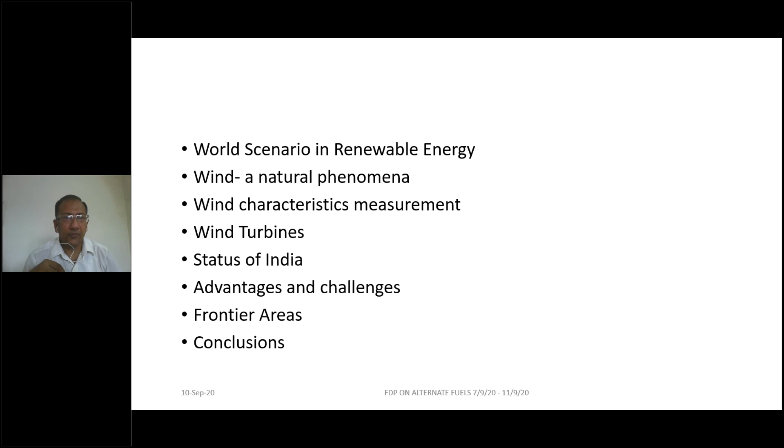The presentation is organized into these main topics: world scenario in the renewable energy sector, wind as a natural phenomena, characterization of wind, various types of wind turbines, status of India, where India stands, advantages and challenges, then the frontier areas, and finally the conclusions of the talk.

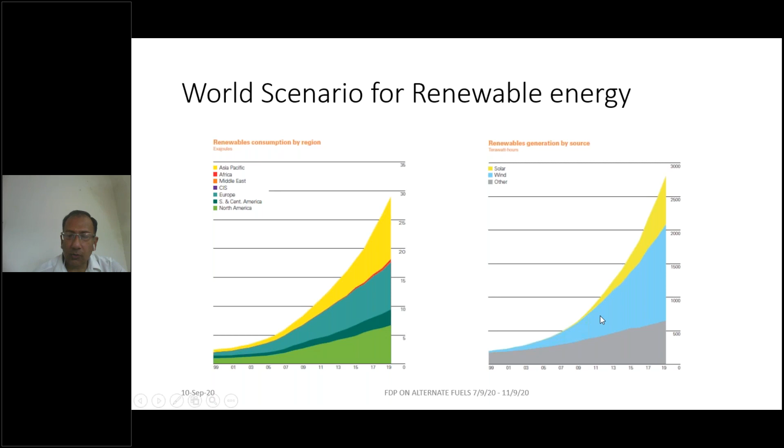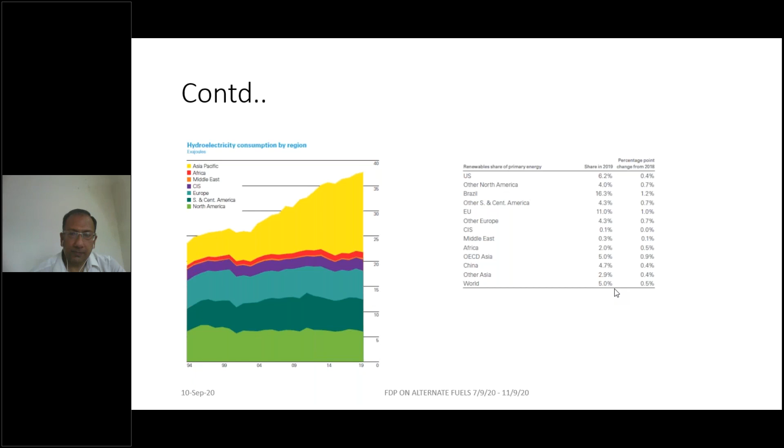On the world scale, we have an international agency called the International Energy Agency, IEA. This is a nodal agency which helps all countries shape a sustainable energy future. It is an agency that helps countries if they approach IEA for any advice, technical support, or other support to shape sustainable energy in the future.

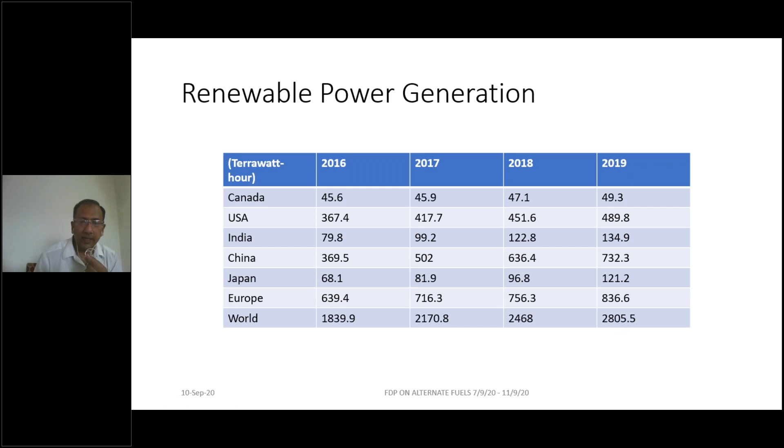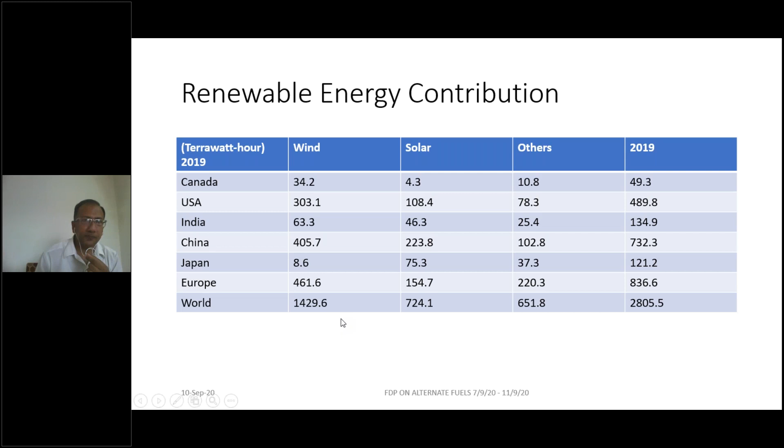Now let's see what wind is. Wind is a natural phenomenon caused by the presence of the sun and solar energy, so it can easily be said that wind is a form of solar energy. The reason for this phenomenon is the uneven heating of Earth, which causes the flow of air called wind. Earth receives around 1.8 into 10 to the power 11 megawatts of solar energy, and out of this, 2% is converted to the movement of air.

That comes to around 3.6 into 10 to the power 9 megawatts. Further, out of this 3.6 into 10 to the power 9 megawatts, 35% of wind energy is available within 1 kilometer of Earth's surface. So you can easily see that if we look up from Earth, we have energy available in the free air itself.

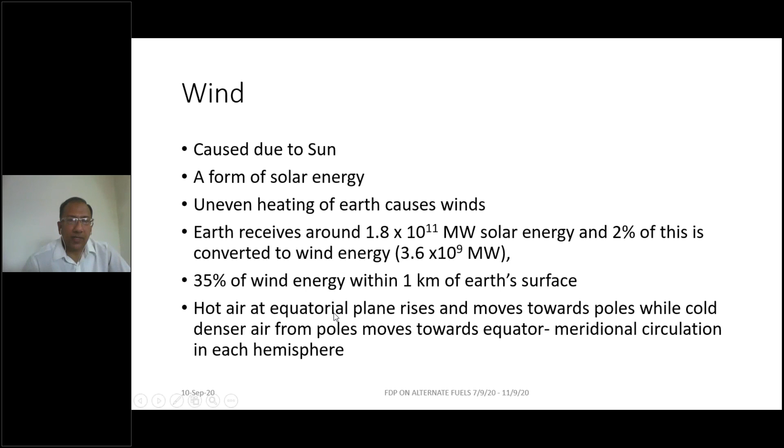The hot air at the equatorial plane rises because the equatorial plane is the hottest region on Earth, and moves towards the poles, while cold, denser air from the poles tries to replace this hot air and moves towards the equator. So ideally, there should be a meridional circulation in each hemisphere, with a flow of air from the equatorial plane towards the poles and vice versa, because the hot air becomes less dense and rises, moving towards the poles, while the cold, denser air from the poles replaces it.

But there are certain other phenomena which make this ideal situation non-ideal. First is the tilt in Earth's rotational axis, which we have studied in lower classes, resulting in seasonal variations. This tilt of 23.5 degrees also influences the meridional circulation. Second is topography: Earth's topography is not the same everywhere. At certain places we have mountains, valleys, hills, plains, or other features, and these features obviously interfere with the movement of air.

Thirdly, the covering on the Earth's crust. The Earth's crust is not uniform everywhere. At certain places we have vegetation, at certain places water bodies, ice, land, deserts, etc. So all these coverings will again influence the behavior or movement of air.

Now the major effect of tilt is the Coriolis effect. The tilt in the rotational axis of Earth results in the Coriolis effect. So the rotation of Earth deflects atmospheric movements—towards the right in the northern hemisphere and towards the left in the southern hemisphere. So the air in the northern hemisphere is shifted towards the right because of the rotation of Earth, and it is shifted towards the left in the southern hemisphere.

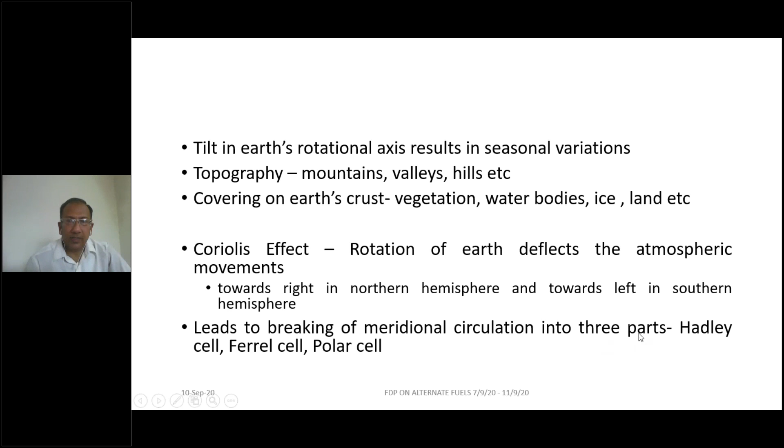This leads to the ideal meridional circulation being split into three parts. We have three types of cells identified: Hadley cell, Ferrel cell, and Polar cell. So this is a diagram—say this is Earth, with North Pole, South Pole, and equator. Had it been an ideal situation, the hot air from the equator should move towards the poles and come back, and the dense air from the poles should come to the equator, giving us a hemispherical meridional circulation.

But because of the Coriolis effect, because of the rotation of Earth itself, the wind is thrown towards the right in the northern hemisphere and towards the left in the southern hemisphere. So the Coriolis effect counterbalances the pressure difference available at the tropics. So the hot air which was available at the top of the atmosphere in the tropics is pushed back towards Earth, and it breaks up into cells—giving us the Hadley cell and Ferrel cell.

Similarly, at 60 degrees we again have a change in the pattern of movement of air. So practically speaking, we have three cells identified: the Hadley cell between the equator and the tropic, the Ferrel cell between 30 degree and 60 degree latitude, and the polar cell between 60 degree and the poles. This type of wind behavior has already been characterized and studied.

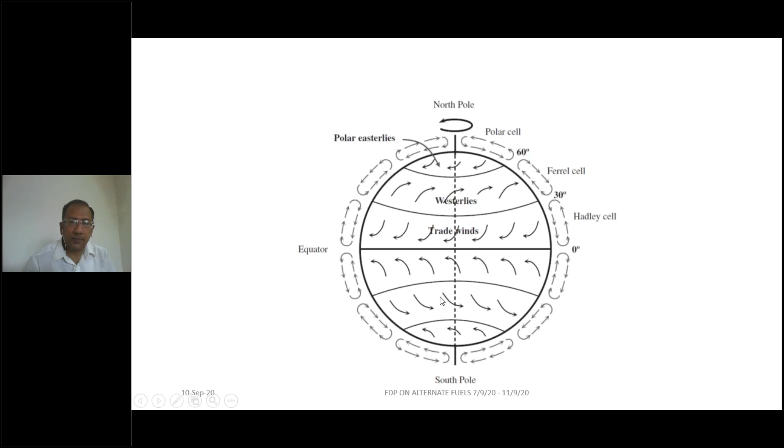Now wind types have been classified into planetary winds, synoptic winds, mesoscale winds, and microscale winds, depending upon the spatial scale of the wind. What we talked about earlier was planetary wind—these are planetary circulation modes, a global circulation where the length of operation is on the order of tens of thousands of kilometers.

Synoptic winds are due to the weather system in a given region, with an effect of about 1,000 kilometers. Mesoscale winds involve regional orographic or thermally induced behavior, at a scale of 10 to 100 kilometers—a very local scale. Microscale wind patterns are totally local, due to boundary layer effects, such as differences between urban and rural areas, with a length of influence of 100 to 1,000 meters.

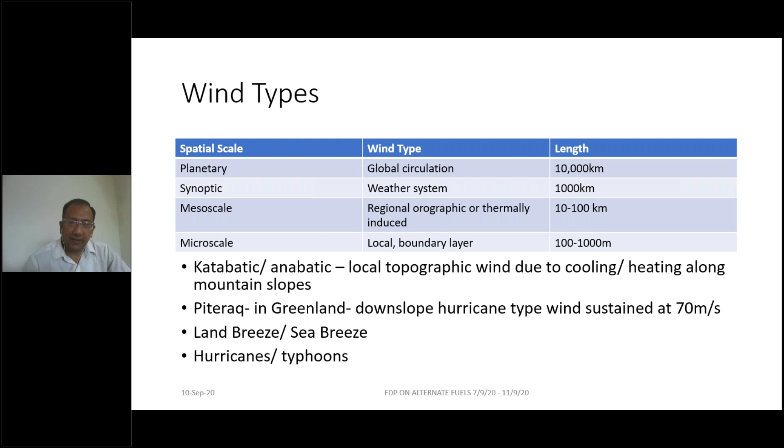On top of all these types of winds, we have certain specialized situations. One is katabatic and anabatic winds—local topographic winds due to cooling or heating respectively along mountain slopes. Piteraq is another type, a hurricane-like wind found in Greenland, where the wind is sustained at 70 meters per second downslope. Then we have land breeze and sea breeze, a topic we studied earlier, as well as hurricanes and typhoons. So wind is definitely a wonderful thing, but it takes many forms.

This diagram shows sea breeze and land breeze on the left hand side. During the day, the land area becomes hotter compared to water bodies, so the less dense air rises, and air from the water bodies replaces the air which has risen up. This becomes the sea breeze—a breeze from sea towards land during the daytime.

At night time, the land is colder than the water bodies. So now the air in contact with the water bodies rises, becoming less dense, and it is replaced by wind or air from the land. That is called land breeze.

Katabatic winds: suppose we have a mountain or hill slope totally covered with ice, or some sort of glacier. The air which contacts this cold surface increases in density and starts falling down, so we find the wind constantly moving along the slope—this is called katabatic wind.

The reverse is anabatic wind. Suppose there's a slope structure, a mountain or something, which is warmer than the surroundings. The air in contact with this warmer surface takes up heat and becomes less dense, so it starts rising. Now we have a rising wind moving from the bottom towards the top of the slope—this is called anabatic wind.

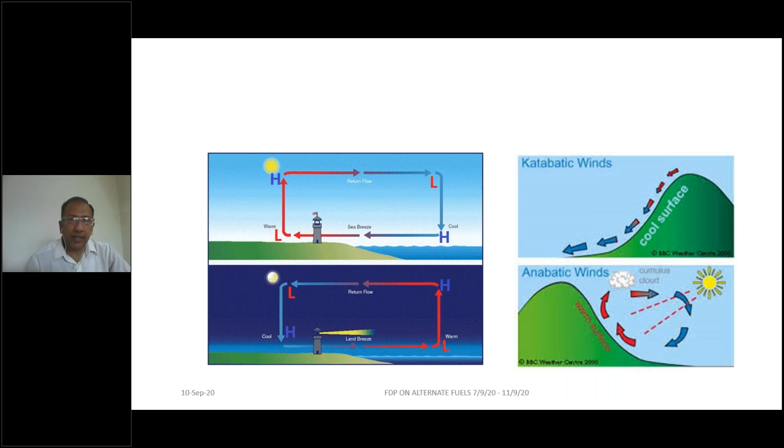With this information, we can easily see that wind takes up many forms, and there has to be certain means to characterize the wind information. So next is measurement of wind characteristics.

This measurement is a very tricky situation. The conventional method was usage of a measurement mast, and it still is. It hasn't stopped. The conventional method is still being used, and it has to be used till newer methods evolve. Generally speaking, 10 meters above ground level we have a pole called the measurement mast. The height is generally 10 meters because that was the standard when we started harnessing wind energy.

So we provide a wind vane system, which gives direction information, and an anemometer. An anemometer is a device used to measure the velocity of wind. We organize a set of anemometers and wind vanes on the mast, take the data, and try to correlate it. This way we are able to measure the characteristics of wind in a given region.

Now the hub heights have increased. Suppose this is a turbine - the moving part is called the hub. The height of this hub has increased, so we have to measure at higher and higher distances. The mast assembly has to be taller and taller, and because of the taller mast, the cost has increased prohibitively. But still, we have to go in for measurement. There's no other way out.

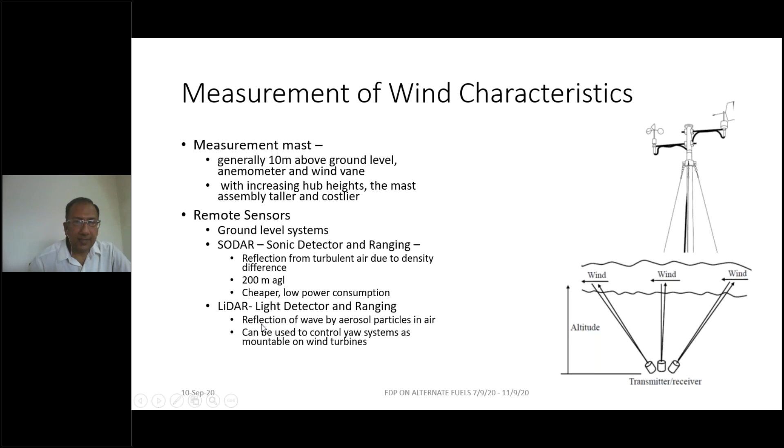This table shows you the recommended tower height, recommended anemometer height, and recommended vane heights. If hub height is 30 meters, 37 meters, 55 meters, 60 meters, 80 meters, the tower height recommended is 30, 34, and so on.

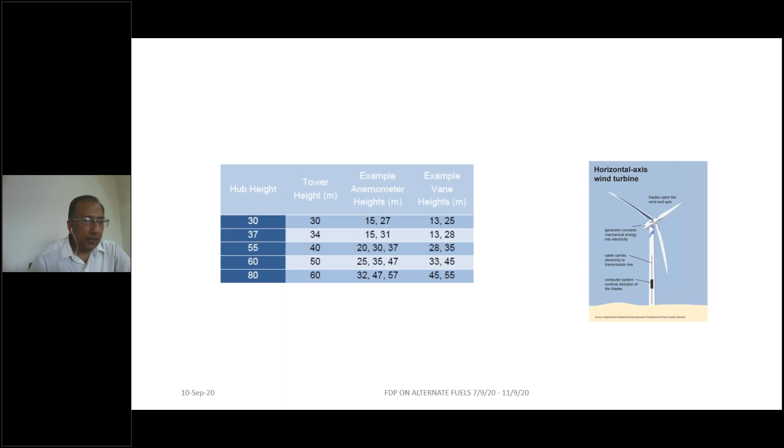We have standardized information on where we should place the anemometers to measure the speed, and where we should place the vanes to measure the direction. This way we can measure the direction and speed of wind, and once this information is ready, only then can we go in for any analysis or project on wind energy harnessing.

This picture shows you a measurement mast. You can see that we have a set of anemometers here, a set of wind vanes here. This is a picture of a SODAR, and this is a picture of a LiDAR.

This information can be further enhanced by usage of wind speed. In consonance with the earlier basic wind rose diagram, even wind speed is plotted on the same diagram. Again we have 0%, 4%, 8%, 12%, 16%, 20% information, representing the frequency of occurrence of wind, but the areas have been colored based upon the wind velocity.

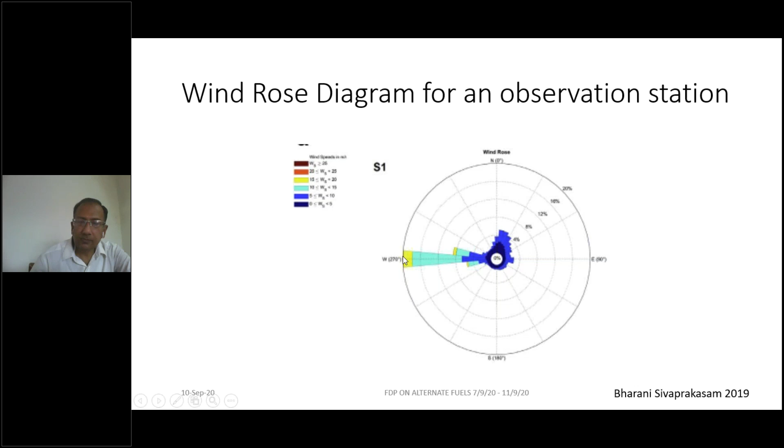This is the annual wind direction and speed for a set of 4 stations placed at a given observatory. We can see that the 4 stations do not give you the same information because wind patterns vary from location to location. This is annualized information compiled by authors Bharani Sivaprakasam in the year 2019.

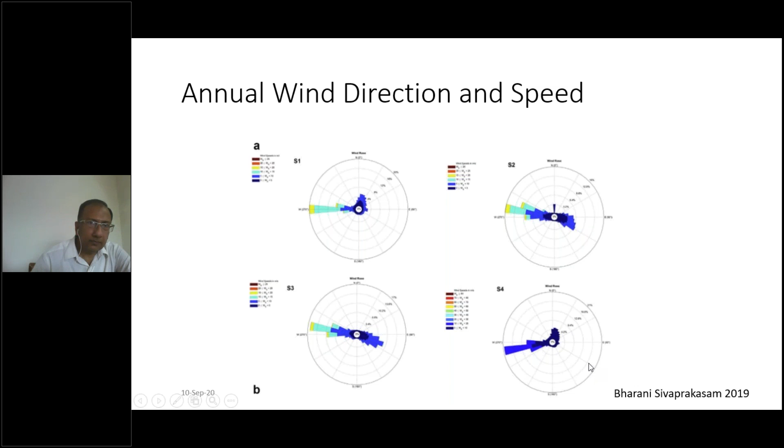Now coming to the equipment for usage of wind energy or harnessing of wind energy. The earlier equipments were called windmills, and the modern ones are called wind turbines. Although common people do not have much distinction between the two words, what is a windmill, what is a wind turbine, technically speaking, by the terminology of wind energy systems, windmills are different from wind turbines.

Windmills were the ancient or older structures which were built to create mechanical work, and mechanical work could be in the form of grain grinding or pumping of water, irrigation, and so on. So they were used in older times. These are 2 pictures: this is the famous Dutch mill, and this is the famous American mill. These are windmills which are only to create mechanical energy, and we are using mechanical energy as such.

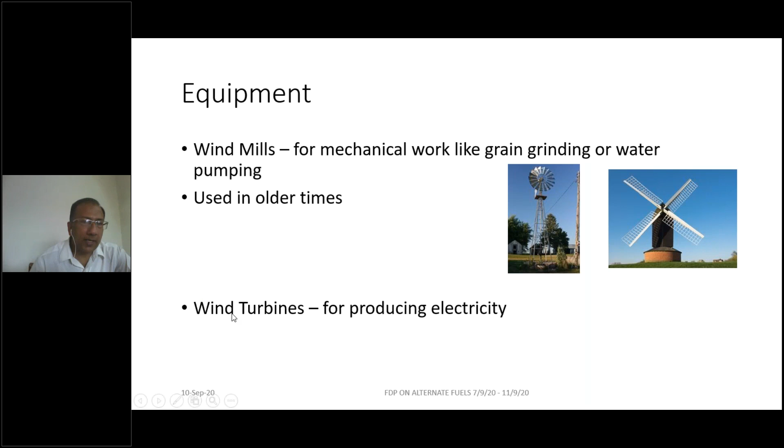But the modern systems, modern wind energy systems, are called wind turbines. Turbine is a universal term used to denote equipment used to generate electricity. The modern systems are being put up only and only for production of electricity, which is why the modern systems are called wind turbines.

Now some basics. The power of wind, which can be harnessed, depends upon the volume of air trapped by the system, the velocity of air, and the mass flow rate. The mass flow rate dm/dt is given by density rho, area of the mill A, and u, the velocity of the wind.

So the kinetic energy is half mu square. Power is energy per unit time, so if I differentiate this with respect to time, I get half dm/dt into u square. Replacing dm/dt, P becomes half rho A u cube, where rho is the density of air, A is the area of the windmill, and u is the velocity of air.

So we can see that power is proportional to the cube of velocity of air. If velocity increases by a factor of 2, the power must increase by a factor of 8. That is an idealized situation.

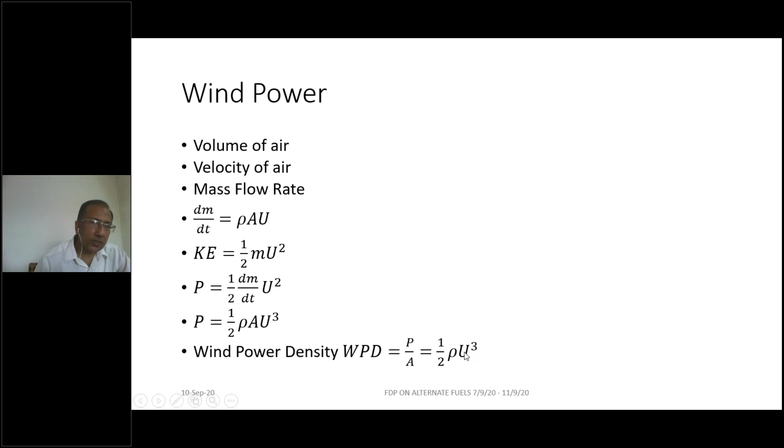Wind power density - this is power as such, in watts. But all the literature talks of wind power density, which is power per unit area. That becomes half rho u cube. So wind power density is directly proportional to the density of air, and proportional to the cube of velocity. This is the idealized situation.

But we have a limit known as the Lanchester-Betz limit. The rotor collects wind energy by slowing down the wind. So windmills operate in the sense that wind energy drives the rotor, energy is supplied from wind to rotor, so the wind gets slowed down. Now it cannot happen that all the energy of the wind is taken up by the rotor, that the wind is brought to a standstill - this is not possible. So the maximum amount of wind energy collected by the rotor can be 16 by 27, or around 59%, and practically this limit is 35 to 45%.

If I take all the irreversibilities in the mechanical system and all other system friction into account, the complete system efficiency drops down to 10 to 30% of the total energy available in wind.

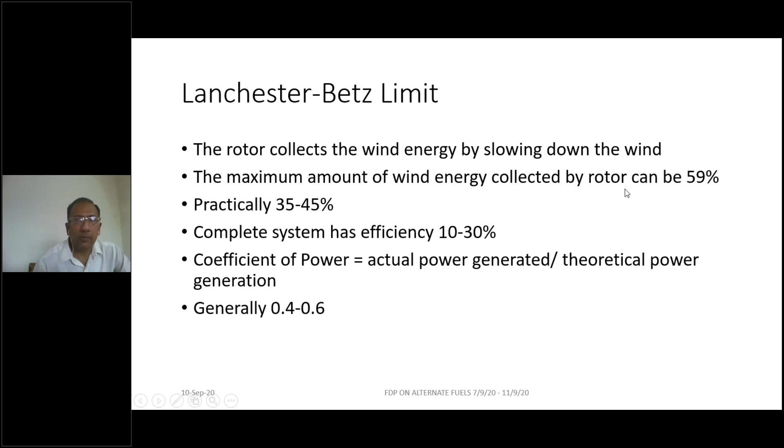Then we define another term called coefficient of power - the ratio of actual power generated to the theoretical power generation possible. Generally the coefficient of power for wind turbines lies between 0.4 to 0.6, so 40% to 60% of the theoretical power is generated by any given wind turbine. 59% is the Lanchester-Betz limit, the limit of energy generation from any given wind source.

One is called cut-in speed, then we have cut-out speed and rated speed. Cut-in speed is the minimum speed at which the turbine blades start rotating and some power starts generating - that is called cut-in speed.

Cut-out speed is the highest speed at which the turbine can work, and if velocity goes beyond this cut-out speed, the rotor should be brought to rest, because otherwise structural damage to the turbine may occur. So there is a limit - the turbine operates between cut-in speed and cut-out speed. I cannot operate a turbine beyond cut-out speed, and I cannot operate it below cut-in speed.

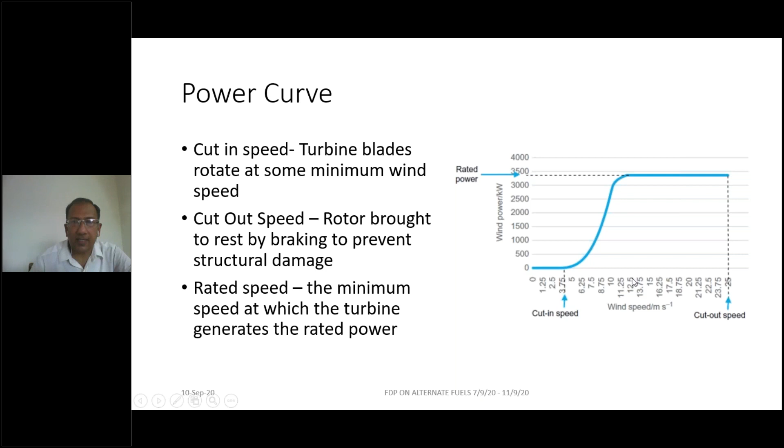The wind power is classified into 7 categories, category 1 to category 7. So 1 is poor, 2 is marginal, 3 is fair, 4 is good, 5 is excellent, 6 is outstanding, and 7 is superb.

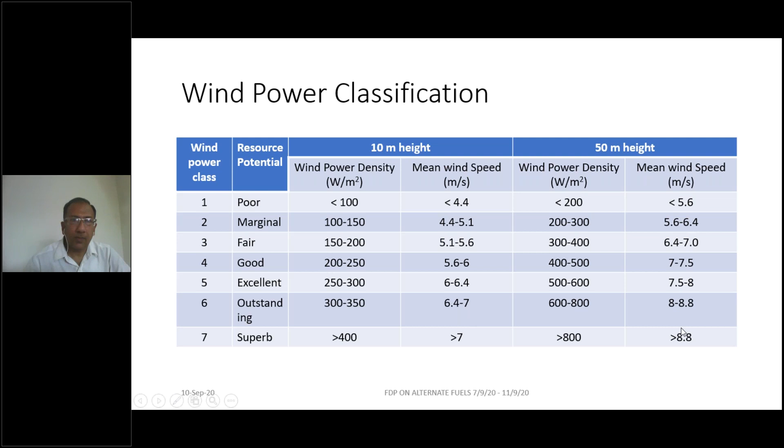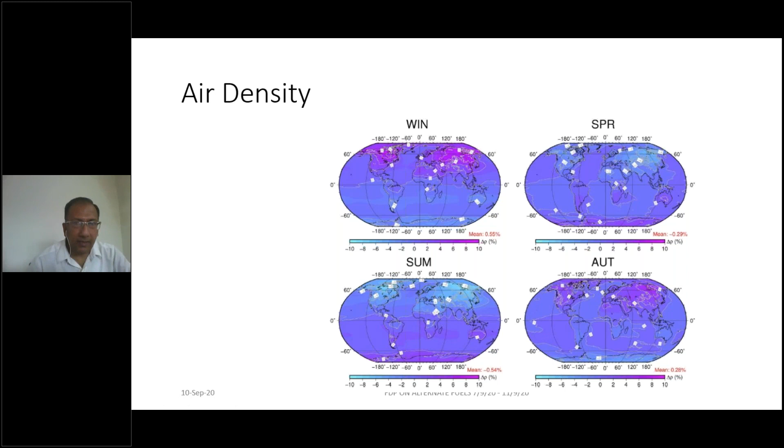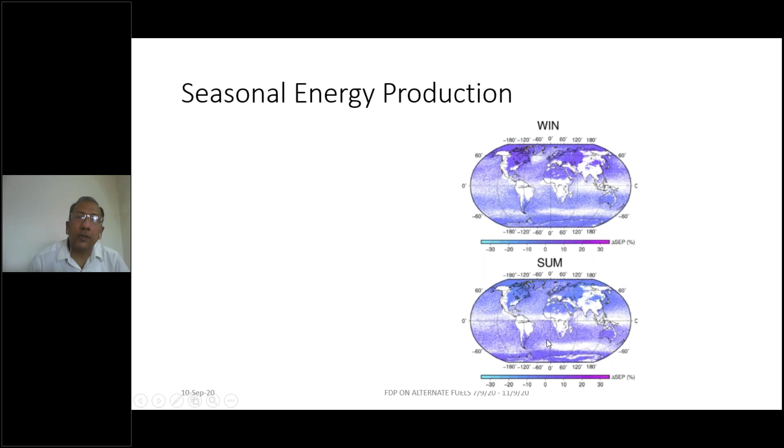Seasonal energy production, winter compared to summer. We can see this comparison in these two figures. In winters, the seasonal energy production shows around 10% change in the northern areas, and it is around minus 5% change in the northern areas during summers.

Coming to equipment, wind turbines are classified based upon various criteria: rotor axis, number of blades, rotor speed, direction, and power control. For rotor axis, we have horizontal and vertical wind turbines. Number of blades can be 1, 2, 3 or more. Rotor speed could be fixed speed or variable speed. Direction could be upwind or downwind. Downwind is not generally preferred because of boundary layer requirements, and downwind blades are not very good in operation. Power control could be stall, pitch, or yaw.

Components of a horizontal axis wind turbine: we have the rotor, which consists of blades and hub; the nacelle, which houses the gearbox, the generator, and the brake assembly; the tower for hoisting the wind turbine; and the anemometer and wind vane.

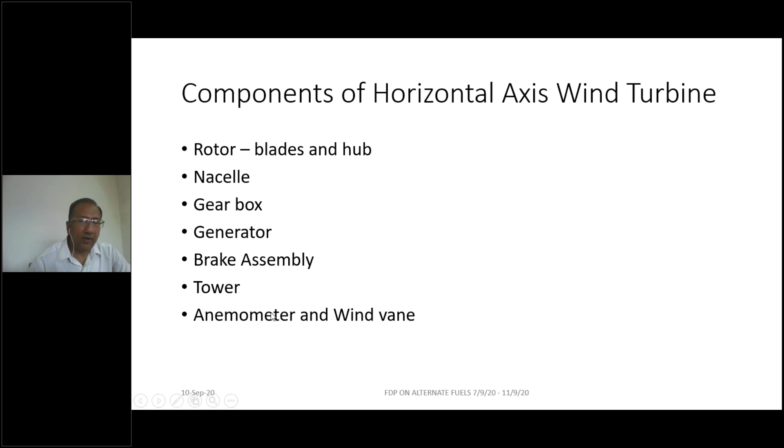We provide an anemometer and wind vane on the nacelle to get information about wind direction and wind speed. According to this information, a controller controls the behavior of the wind vane through yaw control. Suppose the wind direction shifts from left to right, or right to left, then the windmill should rotate, and the yaw mechanism will rotate the mill accordingly.

Lidars can be mounted on the nacelle. So instead of the anemometer and wind vane, a lidar can be mounted here, and the lidar can drive the controller in that sense.

The rotor collects wind energy using the blades, which are attached to the hub, which is connected to the shaft. Blades can be made of wood, fiberglass, metal, alloys, or carbon fibers. The number of blades is generally up to 3, so that interference of wind speed patterns from other blades is not observed.

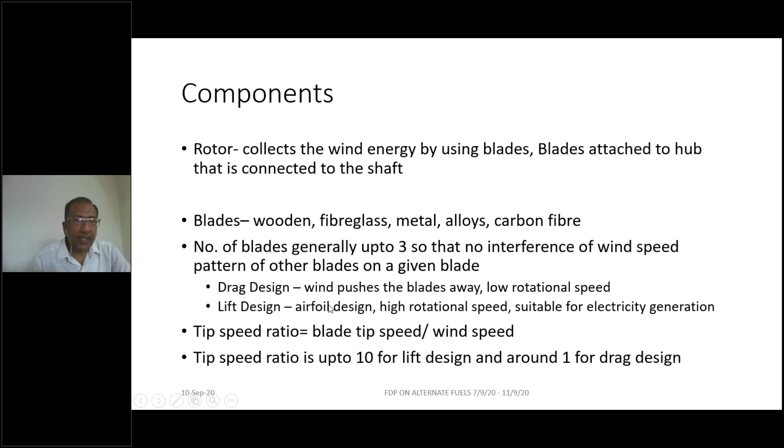We have single blade turbines, two blade turbines, and three blade turbines. In single blade designs, we have a blade and a counterweight. This is the least costly option, but stability is a big issue, so it's generally not preferred.

For two blades, compared to three blades, the two blade design is lower cost. But to prevent wind shocks, complex designing is required. So most turbines are not two blade turbines.

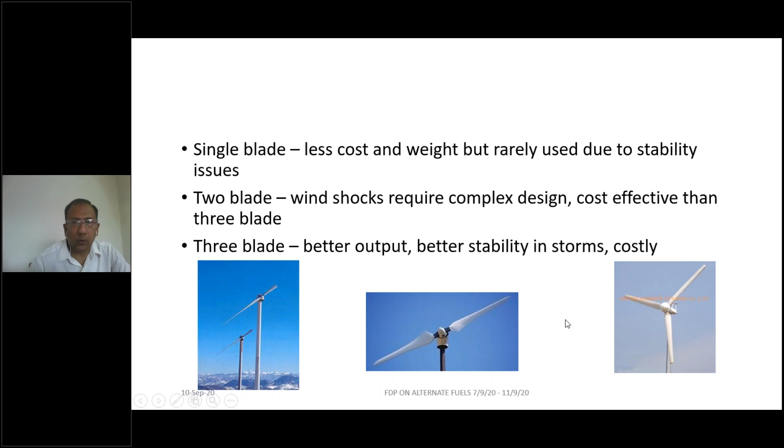Three blade systems give very good output and better stability in storms. They are definitely the costliest of the three options, but still most turbines have three blade systems.

Now the gearbox: we already said that the speed of the turbine is generally 40 to 400 rpm, while the generator operates at 1200 to 1800 rpm, so we require a gearbox.

Electricity generators can be of three types: DC generator, AC synchronous, or AC asynchronous motors. In DC generators, the magnetic field is on the stator and the armature is on the rotor, so it is for local consumption only. When we want to generate electricity and use it locally, we use a DC generator.

AC synchronous motors: synchronization of frequency with the grid is very delicate, which becomes a big disadvantage. The system is very rugged and simple, but constant frequency maintenance is a big headache, so it is costly and prone to damage.

AC asynchronous motors use induction machines. Here we have two options: fixed speed machines or doubly fed induction generators. In fixed speed machines, most machines made in the 1980s to 1990s were of this type. Maximum turbines are of this type, but they are very prone to damage.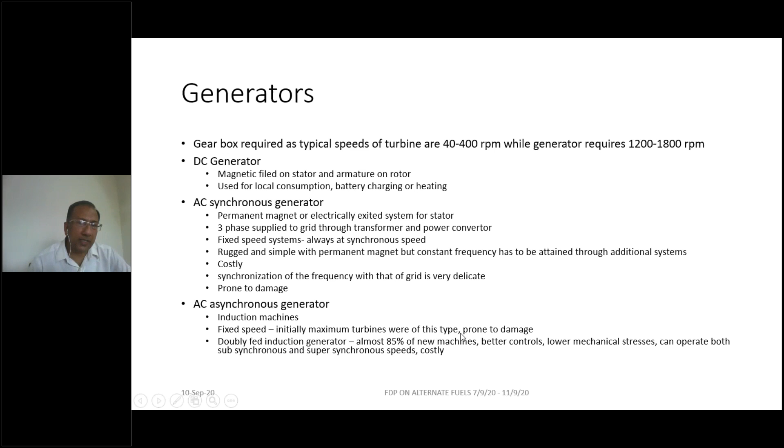Then doubly fed induction generators were investigated, and now the new machines are almost 85% of this type of generator.

Then braking: we have to put brakes on the wind turbine because if the wind speed suddenly increases due to a storm or something, the turbine may be damaged by the high wind speed. So we must brake. There can be a mechanical brake available, or we can have pitching of blades so the wind spills over, or we can use spoilers.

Drag spoiler flaps are provided on the blade or hub, which activate a spring-loaded mechanism to rotate the machine sideways.

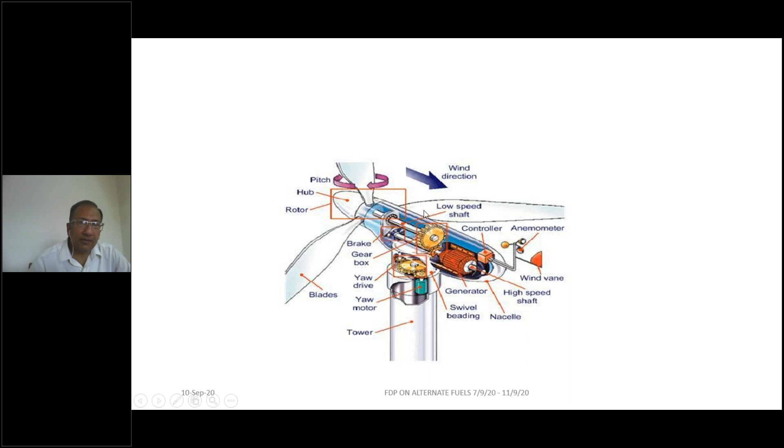We can change the pitch of the blades so the wind is not able to affect them—this is pitching control. Or we can simply have spoilers, which change the direction of the windmill itself. Instead of facing the wind, we make it face 90 degrees, so the wind won't affect the mill. That is the use of spoilers.

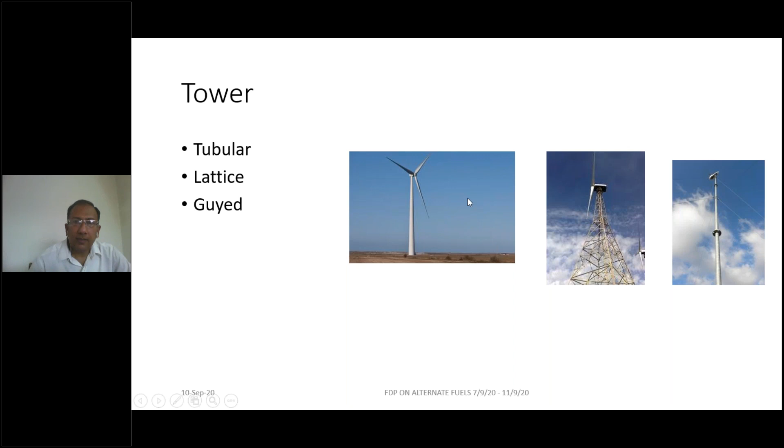The tower for hoisting the windmill can be tubular, lattice, or guyed. Tubular is a simple tubular steel structure. Lattice has a particular type of geometry, and guyed towers use guy ropes to keep the tower in place. The amount of area required for a guyed system is higher than that required for tubular or lattice structures.

Fixed speed systems were in force till the 1990s, which was the Danish concept—these are called type 1 systems. The generator is directly connected to the grid through a transformer. The price is very low, and it is simple and robust, but the stresses are very high and fatigue is very high.

And the power output cannot be optimized. So that is the major disadvantage.

So then we switch over to variable speed. Variable speed systems were used, where the speed was varied using controllers. When controllers come into play, the things become costlier. So we have limited variable speed, and variable speed with power conversion, type 2 and type 3 machines.

Limited variable speed types are OptiSlip and FlexiSlip. Here the resistance of the rotor is changed by the controller mechanism so that the speed gets changed in response to changes in wind speed. So the circuitry is simple, stresses are reduced, we achieve certain partial control, but at a cost.

Variable speed with power conversion has more controllers, so up to 30% variation can be done, compared to only 10% in limited variation. Losses are still lower, but it is a very complex and expensive system.

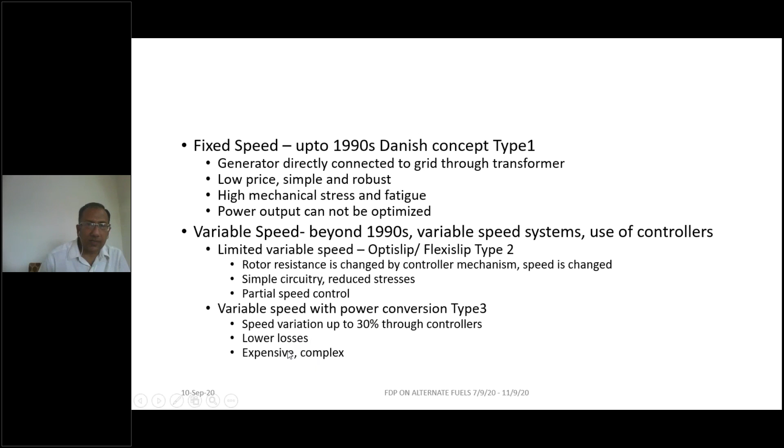So when we have a variable speed system, we measure the RPM of the wind turbine, the nominal RPM, and control the pitch and further information. So we have lots of controllers involved.

We've said that the power curve should be rising and then leveling off for a fixed speed system. If it is a variable speed system, it goes up as shown by the dotted line and then comes down at high speeds. This is how the variable speed system power curve will look like.

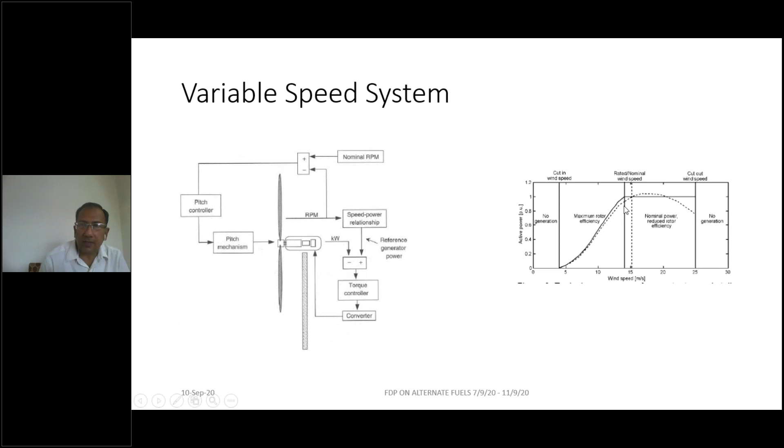Power control is required for reliable and safe operation and for optimizing the output. At higher wind speed, the power generated may exceed the rated values, so we have to avoid this and limit the power generation within some range.

One option is pitch control, changing the pitch of blades. This is a simple concept; the effect of wind speed on blades will be varied, and this way we can have a stable operation. So this acts as a security system for high speed winds.

Initially we had hydraulic actuators which changed the pitch of all the blades in the same manner when pitching control started. But now we have advanced controllers and actuators for each and every blade, because wind turbines have become very large in size, so the top blade and the bottom blade do not have the same load.

We find that the loading of the blades is not the same, so definitely the pitching should not be the same. That's why you have an individual actuator for each blade in the pitching control.

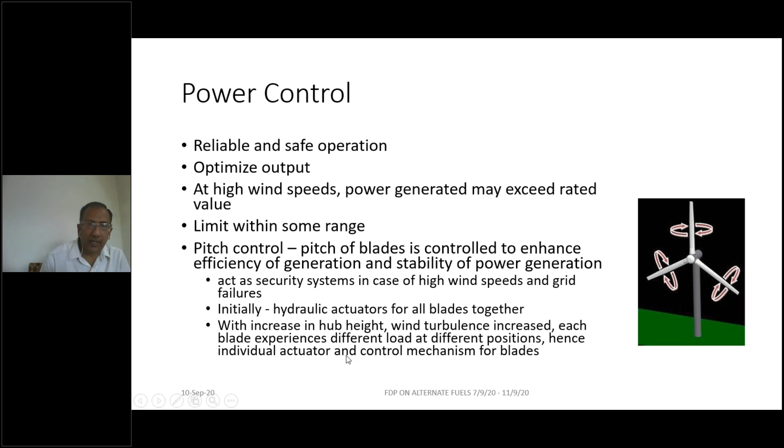Second is stall control, where we stall the blades and make them come to rest. In passive stall control, the blades are bolted to hubs and twisted aerodynamically, so the blade design is such that turbulence generated on the downwind side of the blade leads to no lift at higher speed. When speed is very high, because of the turbulence behind the blade, lifting is avoided. So the system stalls, the pitch changes and the machine stops. It is simple with lower efficiency, but it is very complex to build, so it is limited to small or medium scale systems.

Active stall systems are similar to pitch blade systems, where blades are pitched to waste the energy. These are used for large wind turbines.

Now coming to yaw control, as we said we will talk about later. In yaw control, we try to maximize the power output and minimize the asymmetric loading by usage of a motor. This is a slow action system where we shift the orientation of the turbine itself depending upon the wind speed and direction.

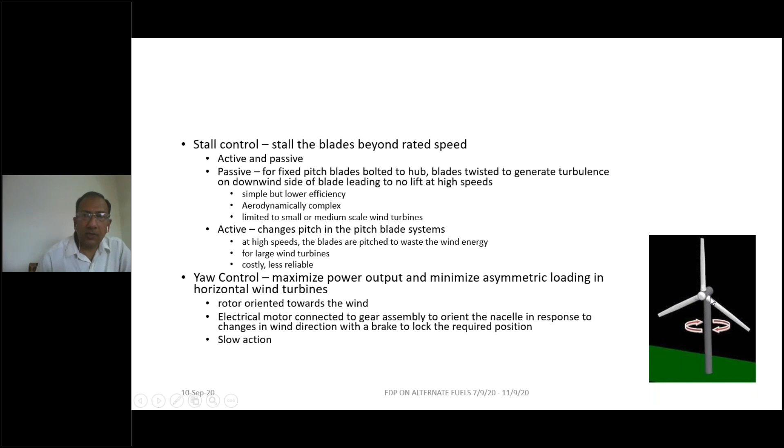Now coming to vertical wind turbines, the second type of turbine. The advantage is the direction of the wind does not affect the operation; wind may flow from any direction and it will still operate. The generator and transmission are at ground level, so weights are lower and costing is lower. But the major disadvantage is they cannot exploit higher wind velocities at higher elevation.

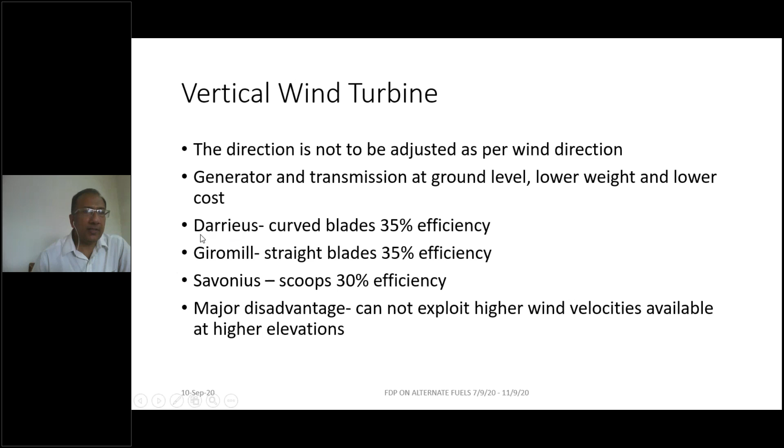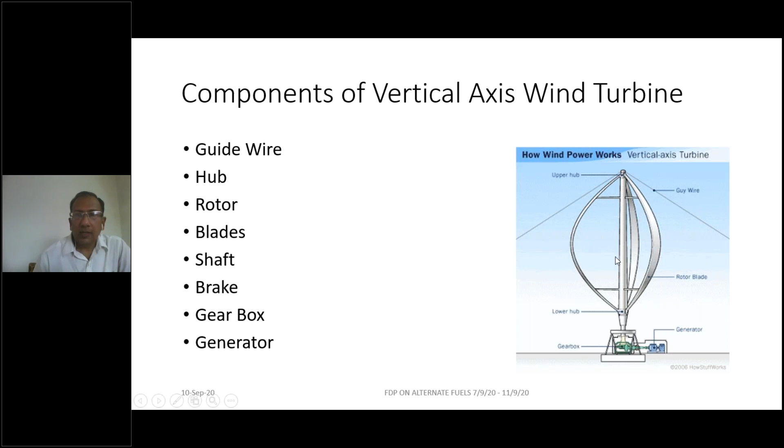So that's why vertical wind turbines are not very famous and not very practically used. We have various designs like Giromill and Savonius type windmills. The major components again include the guide wire, two hubs, blades, shaft, brake, gearbox, and generator, similar to horizontal systems. This is a typical diagram sketch of a vertical system, where the direction of wind does not affect the operation of this type of turbine.

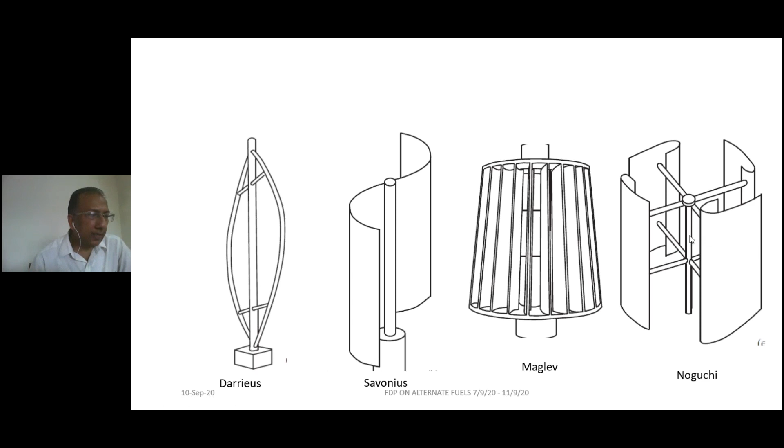This is the Darrieus design, something like an eggbeater. This is the Savonius design, Maglev design, Noguchi design — a number of designs in vertical systems. But the major disadvantage is that wind speed is higher at higher altitudes, which we want to exploit, and it is not possible with vertical systems.

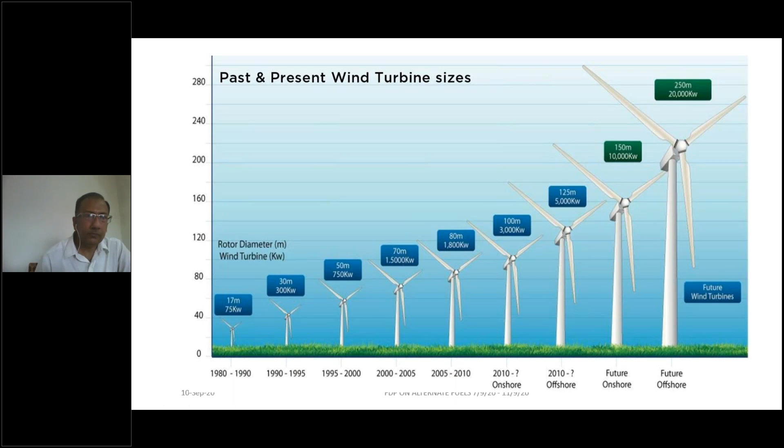The current status of India: India occupies the fourth position worldwide after China, US, and Germany. We have a potential of 102 gigawatts at 80 meter hub height and 302 gigawatts at 100 meter hub height. Gujarat has the highest potential of 44.23 gigawatts. As on date, 34.4 gigawatts of grid connected systems are there, and wind energy accounts for 64% of total electricity produced by renewable sources in India.

4148 megawatts of wind energy projects have been commissioned in the year 2019, and the target is 60 gigawatts by the year 2022. The National Institute of Wind Energy has been created, stationed at Chennai, which is a self-sufficient R&D center mandated to draw wind maps across the country, with many stations to measure wind information.

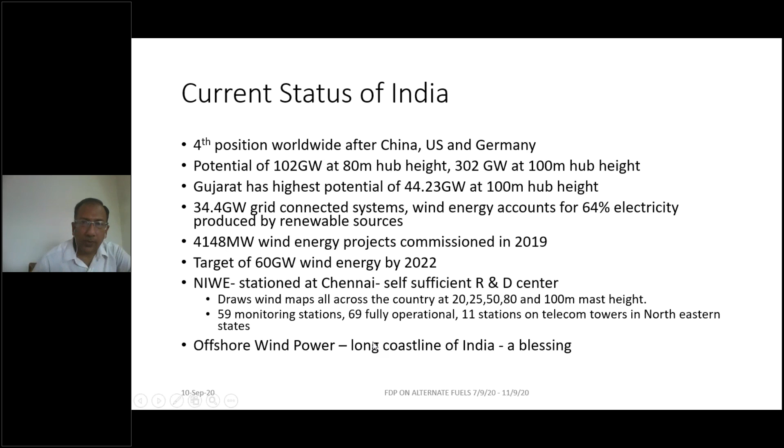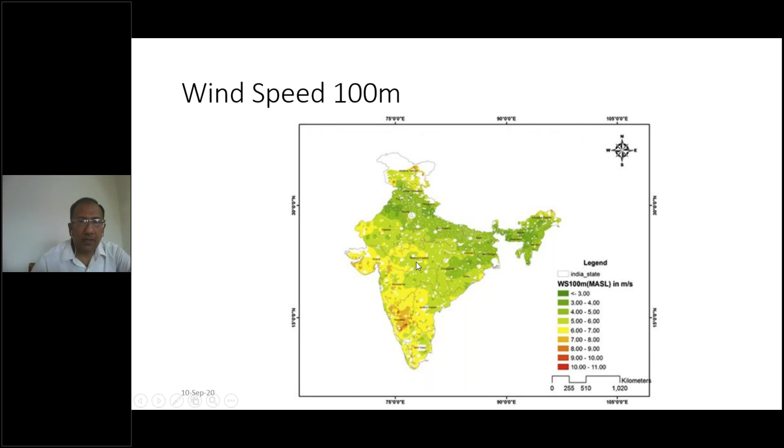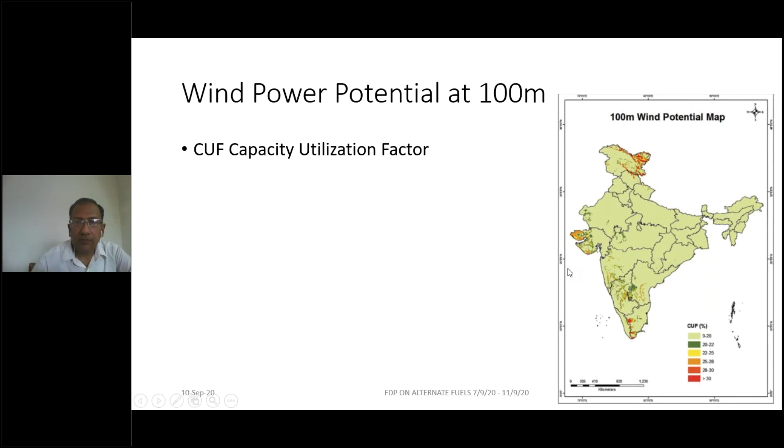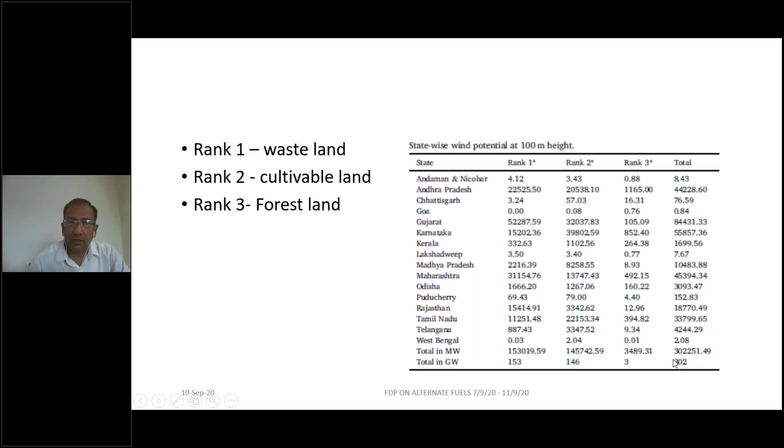State-wise information has been compiled at 100-meter hub height. We have 3 ranks of systems: rank 1 where the land is wasteland, rank 2 cultivable land, rank 3 forest land. For various states and union territories, the potential has been listed, with a total potential of India at 302 gigawatts at 100-meter hub height.

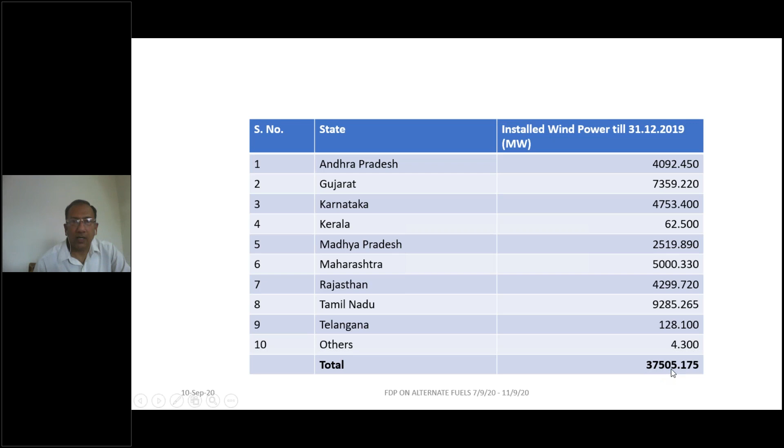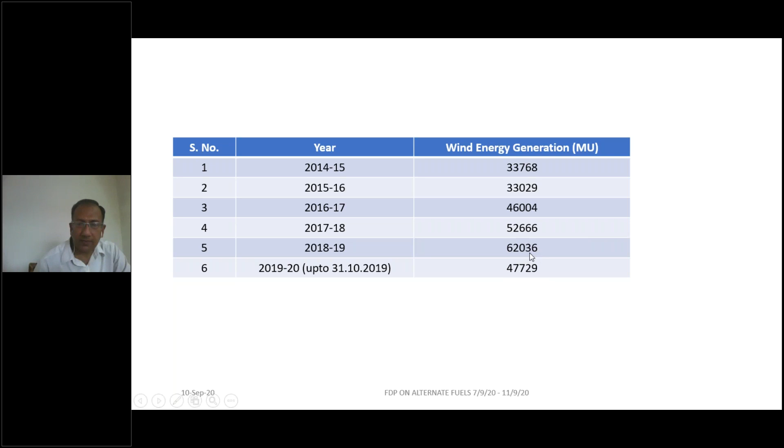Wind power potential at 100 meters and 120 meters: at 100 meters it is 302 gigawatts, and at 120 meters it is 695.5 gigawatts. So obviously, the higher we go, the better the potential.

The barriers we face in India are technical barriers, financial barriers, environmental barriers, and socio-economic barriers. Technical barriers: first of all, lack of infrastructure and institutions. The Indian market is flooded with European technology, so there were almost no local standards, but nowadays local standards have been formulated, and 31 models are being produced by about 15 companies, achieving around 70 to 75% indigenization.

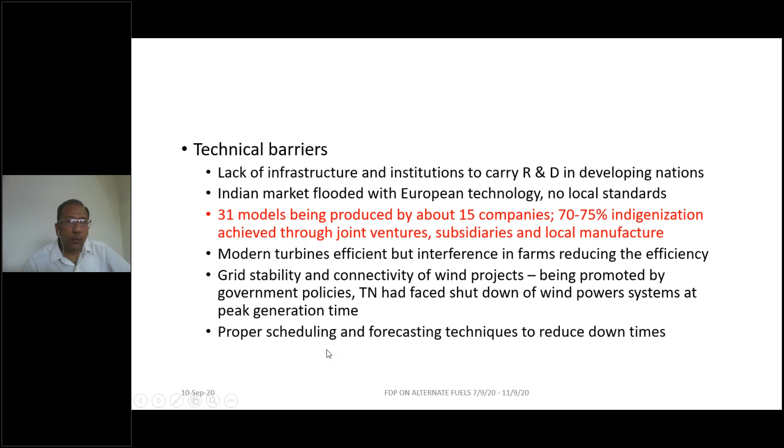Modern turbines are efficient, but when we talk of wind farms, there may be interference and efficiency will be lowered. Grid stability is a big issue in India; it has been emphasized in yesterday's lecture by Professor Sharma also that the Indian grid is very fragile, so lots of work has to be done to make it stable. Proper scheduling and forecasting techniques are required to reduce downtimes.

Financial barriers: the initial investment is very high, so the risk factor is very high. Distribution companies may not buy the excessive energy, or they may withhold payment, which disturbs the apple cart. Competition between companies may lead to financial barriers, and wind energy tariffs and policies themselves may be prohibitive.

Environmental barriers include effects on wildlife and bird fatality. Environmentalists say bird fatality must be taken into account because it is very high with wind turbine systems. Wildlife habitats also change, so we must keep this in mind.

There is visual disturbance: if we place wind turbines near roads, there can be reflection of light from the rotor blades and shadow flickering, which can cause problems for motorists. There is noise pollution, aerodynamic or mechanical in nature. There can also be local climatic changes, because we are artificially mixing hot air with vapor, so such climatic changes have to be documented.

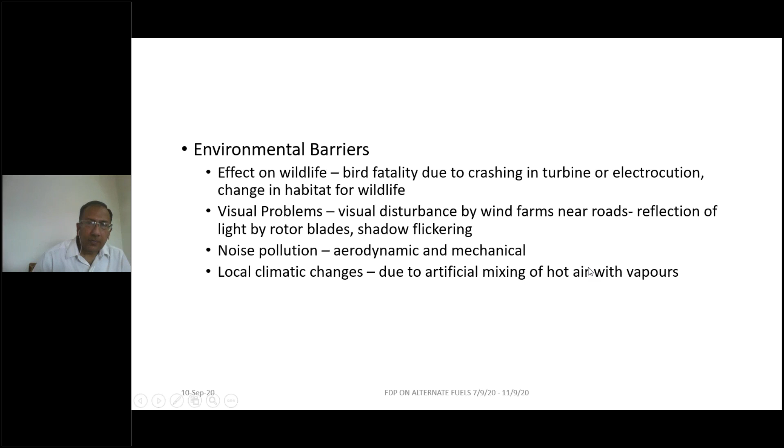Socioeconomic barriers: the local populace may not allow you to acquire land at certain important sites. Then there's the NIMBY syndrome, not in my backyard, where people avoid such installations near their places, and the transportation of large components by road may be opposed by the public.

Government policies play a decisive role in promoting or demoting technology or systems. Some policies of the Indian government are listed here. The Integrated Energy Policy 2006 envisaged a strong network of renewable energy systems: private land could be used for wind farms, tradable tax relief certificates could be allowed, and IREDA, the Indian Renewable Energy Development Agency, was converted to a national apex body to take care of finances for all renewable systems.

Generation-based incentives were introduced in 2009: an incentive of 0.5 rupees per unit produced if the plant supplies for a minimum of 4 years and maximum of 10 years, with a capital cost of 1 crore per megawatt required to avail this incentive. Renewable energy certificates were introduced in 2010, and trading was allowed.

The Clean Energy Fund was set up in 2010-11 to create green energy corridors. The 8 windy states have been sanctioned 10,000 crore rupees to improve intrastate as well as interstate transmission.

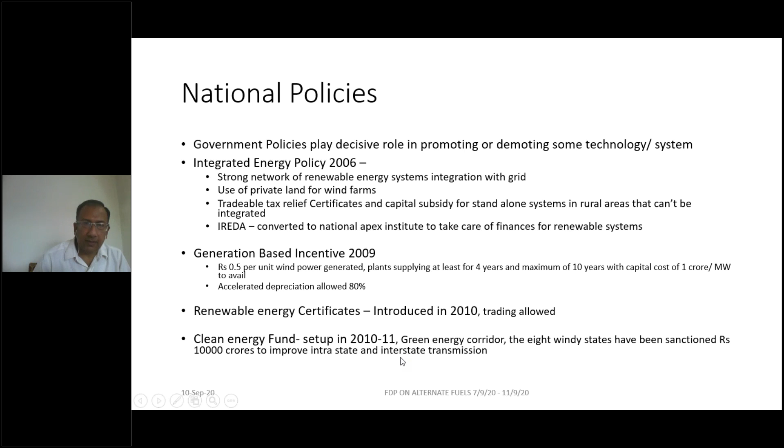The Offshore Wind Energy Policy came in 2015. Resource assessment has been carried out in coastal areas of Tamil Nadu and Gujarat. Tamil Nadu is found to have better potential compared to Gujarat, but still 1 gigawatt capacity is proposed to come up in Gujarat because Gujarat has been very active in pursuing this project. NIWE is the nodal agency for taking up this work.

NIWE has been created and designated as the nodal agency for all wind-related systems. The Wind Bidding Scheme 2016 requires wind energy projects of 1 gigawatt capacity to be integrated onto the central transmission utility. E-bidding of wind energy is allowed so that non-windy states can buy wind energy from windy states in a transparent manner.

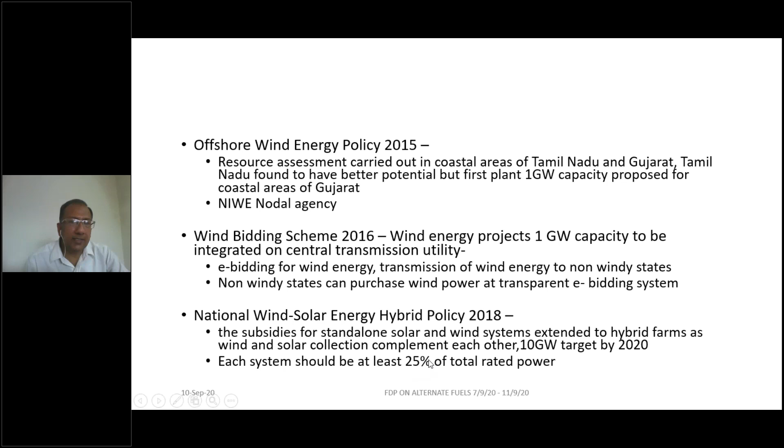The National Wind Solar Energy Hybrid Policy 2018 allows subsidy for standalone wind and solar systems to extend to hybrid solar and wind energy farms, with the requirement that each of the two components contribute at least 25% of the rated power. This shows government policies have been consistent in pushing renewable energies, and state-wise tariffs have been allowed.

A 2500 megawatt interstate transmission system has been sanctioned to connect the solar-wind hybrid projects, and the Solar Energy Corporation of India has been made the nodal agency. 11,000 crores have been sanctioned for the Leh Ladakh transmission line to connect the solar and wind projects in the cold desert to the rest of the country.

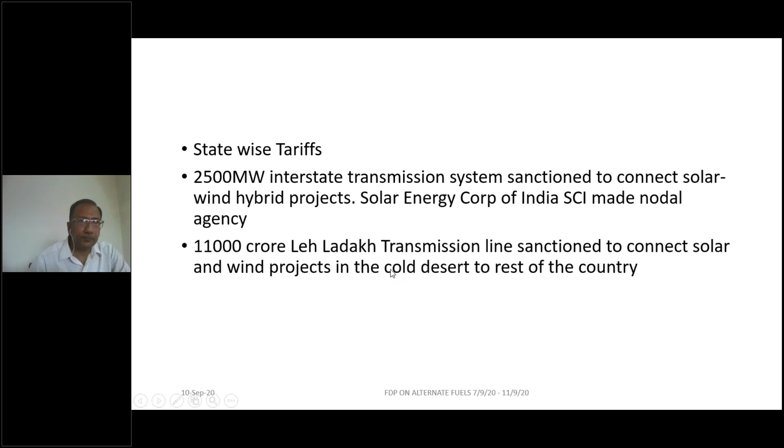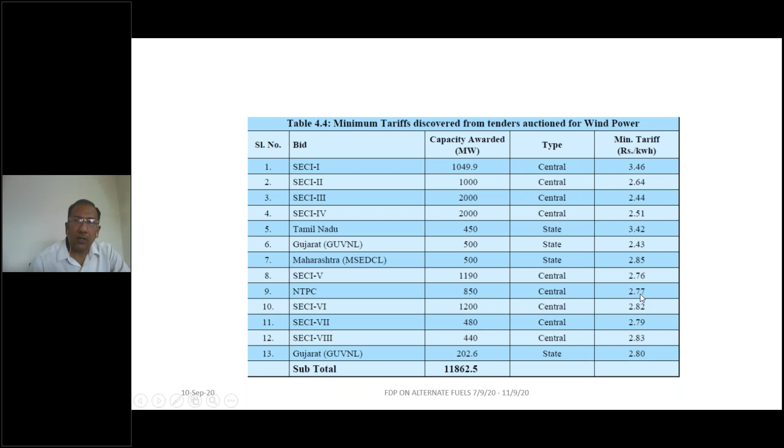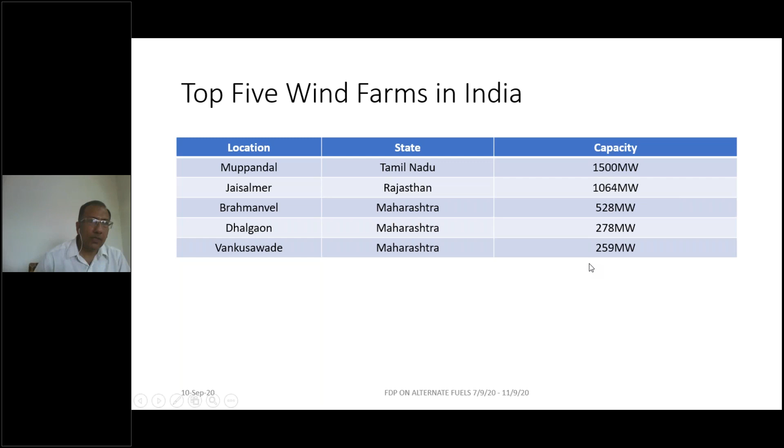Now coming to the advantages of wind power: it is a clean source of energy. We don't have any problem of CO2, SOx, NOx, or particulates. The only greenhouse gases associated are during the manufacture of turbines. 1 megawatt of wind energy offsets 2,360 tons of carbon dioxide.

Sustainability: wind is a sustainable system as long as sun is available, so winds are sustainable. With global warming, more turbulence is generated, so sustainability is not an issue. Windy areas are generally not in competition with urban development areas, so location is not much of an issue. Energy security is better too, since wind is a raw material with no cost.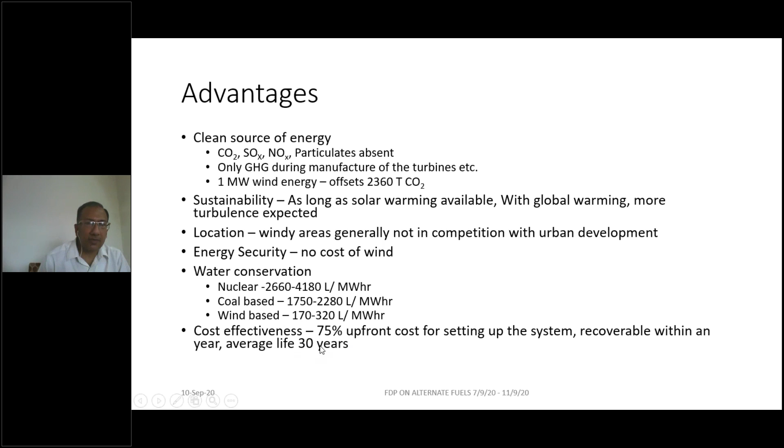Water conservation and cost effectiveness: 75% of the cost incurred is in setting up the system, and this is recoverable within 1 year. The average life of wind systems and wind turbines is around 30 years.

Challenges: intermittency of wind. Wind has a very unpredictable behavior. There can be a situation where when I require power, there's no generation, and when I have generation, there's no requirement. So we have to go in for storage facilities.

When we go in for storage facilities, we're multiplying the components, so things become costly. But there's a possibility to store energy in the form of latent heat, sensible heat, or in batteries.

Wind turbines are located remotely, so transmission costs may become high. Noise pollution can also be a problem.

If we are around 500 meters away from a wind turbine, the noise is around 35 decibels, whereas normal conversation is at 60 decibels, so that becomes acceptable. Wind turbines should be at least 500 meters away.

Aesthetics is a problem since people may not like the scene. There's also damage to wildlife - fast-moving turbines are more fatal than slow-moving ones.

It has been estimated that 33,000 bird deaths have been caused by wind turbines, compared to 100 million deaths attributed to cats in the USA. So wind turbines do contribute to bird deaths.

But compared to other activities or natural systems, the numbers are very less. Safety-wise, a loose or warped blade may damage the tower itself, so we must locate turbines away from habitats. Capital cost is also very high. These challenges must be addressed for better harnessing of wind energy.

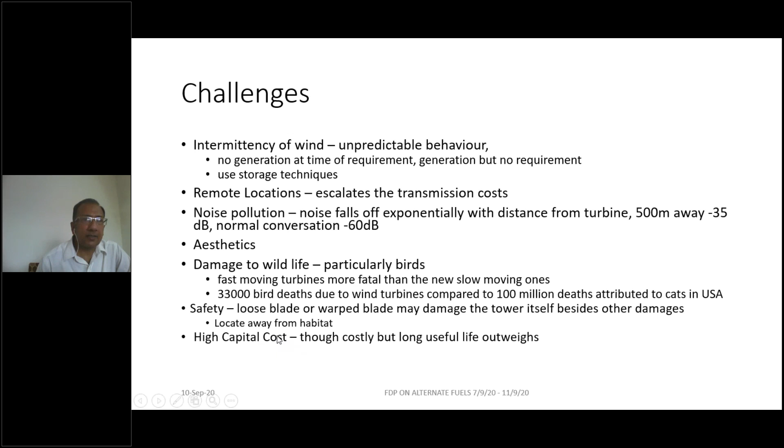Environmental impacts include noise, both aerodynamic and mechanical. A howling sound is made when wind passes through the blades, and mechanical components may also create noise. With adequate design, this noise can be reduced.

Visual impacts: certain countries have created norms that the colors of the windmill should be in consonance with the surroundings, so that the visual impact is smoother.

Disco effect: shadow flickers and reflection of light from the blades can take place. Blade motion can cause flickering shadows, so this has to be avoided.

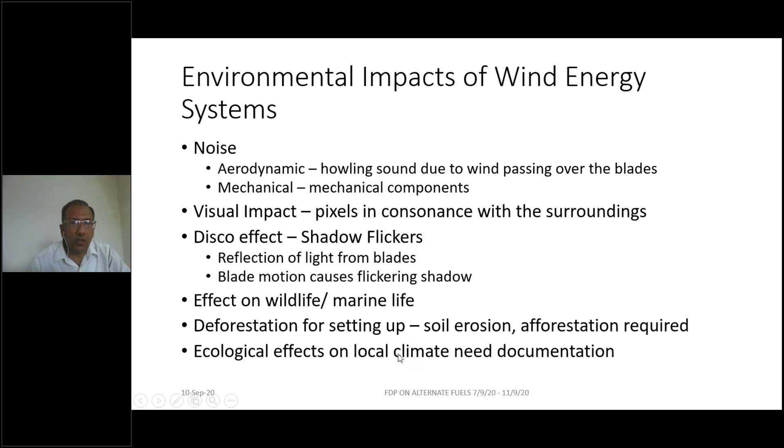Wildlife and marine life may be disturbed. When we set up a plant, there is deforestation, so as soon as the plant is set up, we must go in for afforestation so that soil erosion is arrested. The ecological effect on local climate needs documentation.

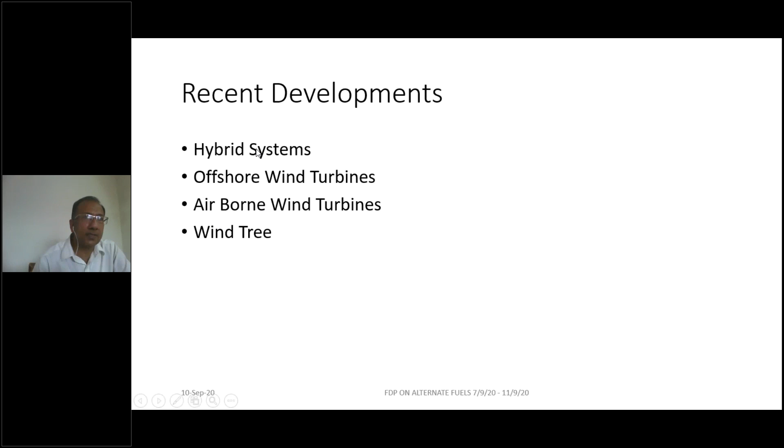Coming to the frontier areas of recent developments, we have hybrid systems, offshore wind turbines, airborne wind turbines, and wind trees - concepts currently being investigated.

Wind-solar hybrids and wind-hydrogen hybrids. For wind-solar, when we put up a wind farm, there's lots of area available that isn't usable for wind generation. We can put solar cells or solar panels underneath, creating a hybrid between wind and solar energy.

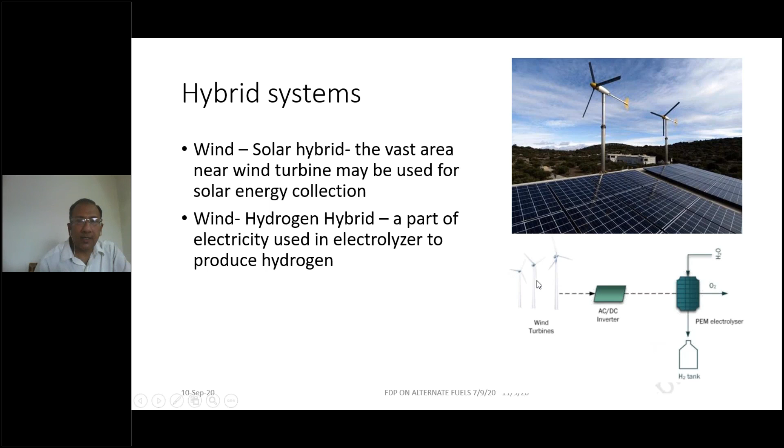The second hybrid is wind-hydrogen. We produce electricity from the windmill, and a part of that electricity is supplied to an electrolyzer to produce hydrogen, which is a clean fuel. This hybrid is also being researched.

Then we have offshore wind turbines. USA has a potential of 2,000 gigawatts offshore. These turbines can be very tall, with no problem of height, flickering, and so on, because they're placed away from human habitats.

Underwater cabling is used. India has a target of 5 gigawatts by the year 2022 and 30 gigawatts by 2030. So these are the targets that have been set.

As mentioned previously, the potential is 302 gigawatts. The first offshore turbine was put up in Denmark, and it is decommissioned right now. Still, 28.308 gigawatts of systems are in operation offshore.

UK is contributing 9,945 megawatts, China is contributing 5,930 megawatts, and so on. So each country has its own contribution to offshore wind, including UK, China, Denmark, Germany, Netherlands, and Belgium.

50% capacity addition has taken place in offshore wind in the last 3 years, so that is a very recent phenomenon. We can see that wind turbines placed offshore can have a spar buoy type floating arrangement, where guy wires keep the wind turbine in place. We can also have semi-submersible designs, floating as well as submersible, and then tension leg platforms with a single anchor and guy wires to keep it in place. So many designs are being investigated.

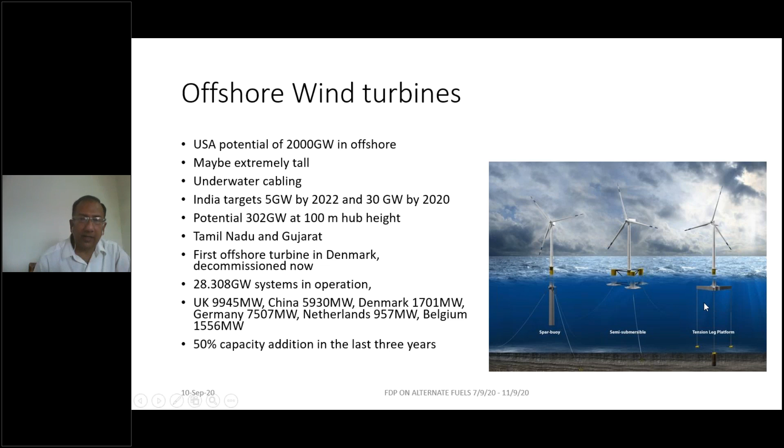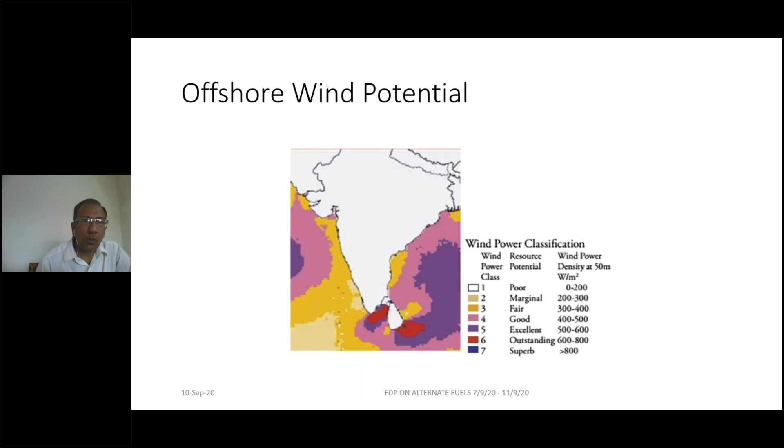A very recent concept is the wind tree. Researchers have tried to mimic natural trees with a wind tree, using a steel structure for the stems, with leaves that are actually aeroleaves painted green. These leaves are silent systems. First of all, wind direction does not affect the operation of this system, and they can work with low wind speeds.

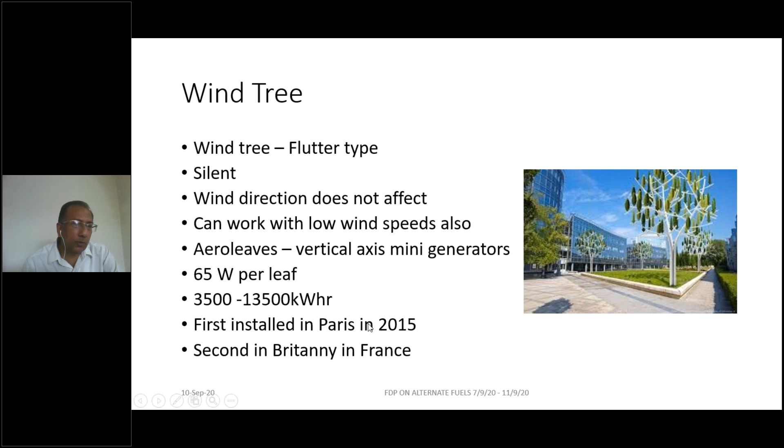Aeroleaves are basically vertical axis mini generators in themselves. Each leaf contributes 65 watts, and the power generated can be 3,500 to 13,500 kilowatt hours from a single tree. The first wind tree was installed in Paris in 2015, and the second was placed again in France, in Brittany. The threshold speed for operating an aeroleaf is 2.5 meters per second.

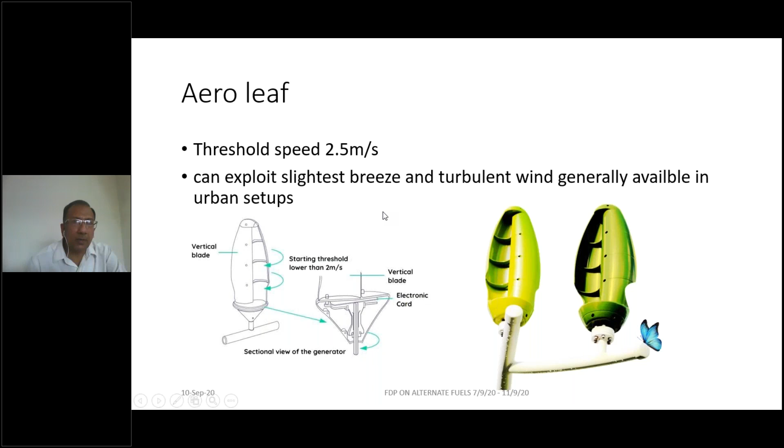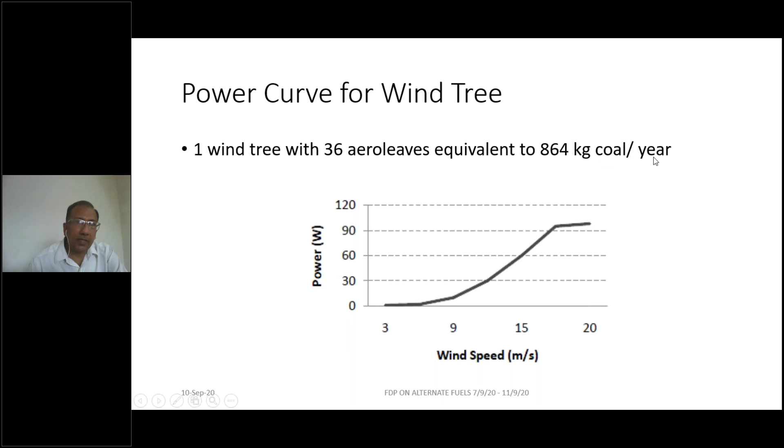The power curve for a wind tree is very different from the power curve for wind turbines. In wind turbines, the power curve rises and ultimately settles off. Here, it is constantly increasing with speed and ultimately leveling off. This curve has been investigated for a wind tree. One wind tree with 36 aeroleaves is equivalent to 864 kg of coal burnt per year. So that is the data available for wind trees.

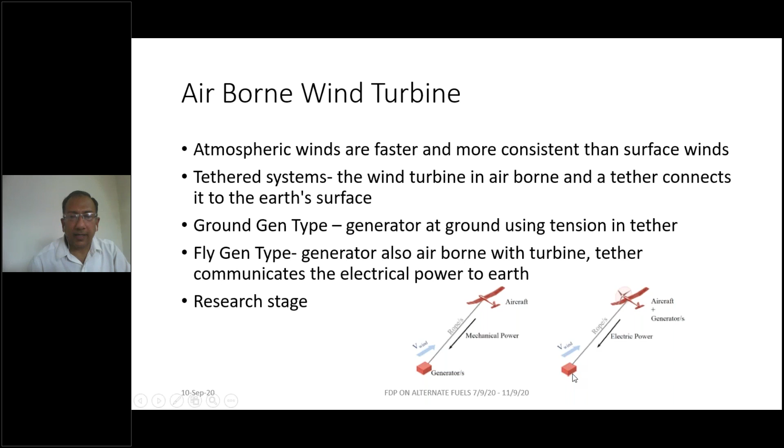We have two concepts: ground gen type and fly gen type. In ground gen type, the generator is placed at the ground, and the tension in the tether is used to run this generator. In fly gen type, the generator itself is also airborne, and the electricity is conveyed to the feeder at the base of the Earth. This concept is again at a research stage.

To conclude what I have said in this presentation: wind energy has very high potential for harnessing and is definitely a green energy. The challenge of inconsistent behavior of wind must be investigated. Capital costs are very high for wind energy systems. Efforts are required for efficient and accurate means of predicting wind behavior so that inconsistency can be kept in check. Simulated data, from software used to simulate wind behavior, must be corroborated with physical measurements, which is a big issue.

New techniques are being investigated for better tapping of the energy available. So lots of research is required, first for efficient and accurate means of predicting wind behavior, then the predictions must be corroborated with physical measurements, and new techniques are being investigated.